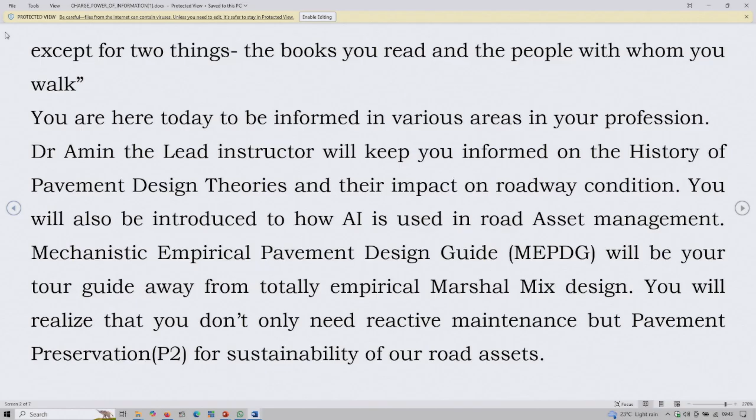You will also be introduced to how AI is used in road asset management. Mechanistic empirical pavement design guide will be your tour guide away from totally empirical Marshall mix design. You realize that you don't only need reactive maintenance, but pavement preservation for sustainability of our road assets. At the end of this program, you will have access to professional materials that can enhance your skills and help in your pursuit of excellence.

And I am also convinced at the end of this professional impartation that you will either be running with a vision, going on a mission, or burning with a passion. Belong to any of these. Happy participation.

A round of applause for Dr. Ayo TB. Thank you. That was wonderful. Information is key. Ladies and gentlemen, so now just a quick one.

Yesterday we had introduction to roadway network components, parameters impacting road network conditions, resilience, and sustainability, history of pavement design theories and their impact on roadway conditions. We had discussions, questions, and answers, and yesterday was the opening ceremony. Today is going to be a very beautiful and wonderful day.

May I now invite to the stage for his citation our lead speaker for today, Engineer Dr. Patrick Amoah Becker. You can come up stage now. His citation is on page 10. I'll quickly go through it so you know who will be taking us. Just stand and face. I'll read. Now, the citation of Dr. Patrick Amoah Becker.

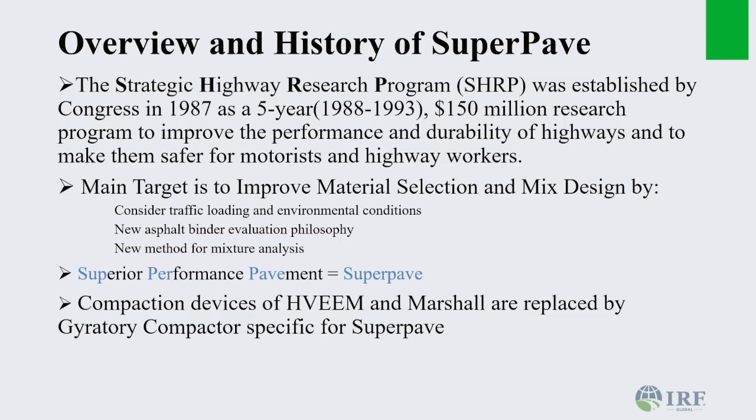I should point this way. Okay.

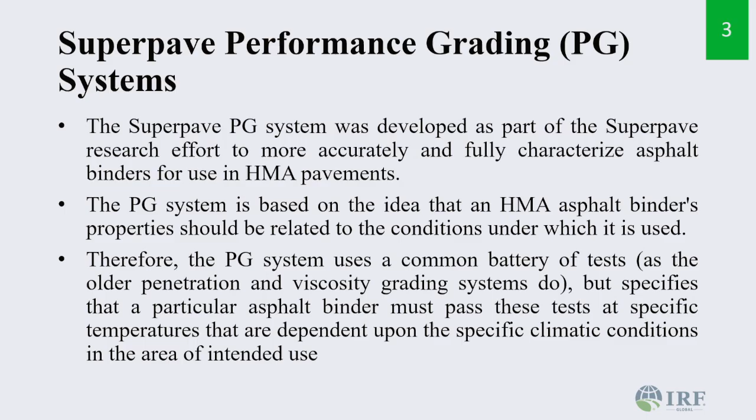So they developed what we call the PG system, performance grade system for hot mix asphalt. And before I go ahead, I don't know whether yesterday you talked about it. When I returned from the US, I was in a meeting in my office talking about asphalt, and the old people were all watching me. You are working in feeder roads and you are talking so much about asphalt, what's wrong with you? So, you know, we use bitumen. The Americans call it asphalt.

Sometimes it's confusing for us when we say asphalt. They think we're talking about the concrete, the mixture. Okay, it's the same in Nigeria. So I was actually talking about bitumen, the binder, but everybody in the room was thinking I was talking about the concrete, the mixture. That's the American way of calling the bitumen. So when I say asphalt, know that I'm talking about bitumen, okay? Or I'll use binder instead.

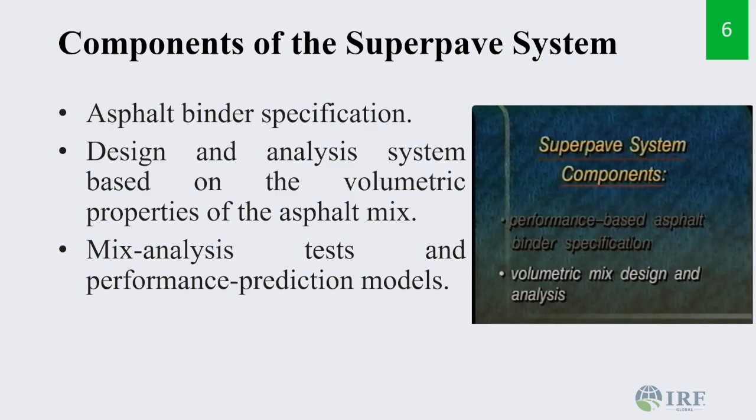So let's try and understand the Superpave mixture. It had certain components, and mainly we wanted to understand the binder and the volumetric properties. So what about the binder did we want to know? Remember, what do we do in Marshall? In Marshall, what are the tests that you typically do on your bitumen?

Stability, flow, penetration, yes. Now, just think about the test, the meaning, and what do we want to simulate? You realize that this test gives you, yes, an idea of the temperature that it can resist in a way, but what they sought to do under Superpave was they wanted a binder that can withstand high temperature, which will affect rutting. Yesterday he talked about it, and also very cold temperature.

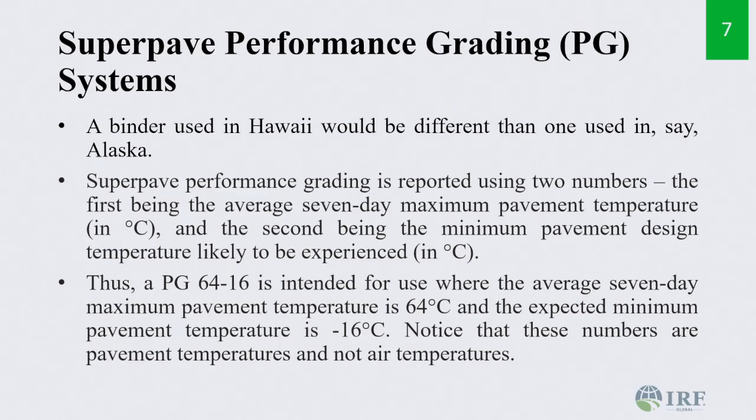So just by looking at the binder grade, we'll be able to tell the various temperatures, whether it's in cold or warm temperature. So they developed what we call the performance grade system, and I'll explain that going forward. Okay, so what is the PG system? So the PG is the performance grade, and here we are simulating the environment. We are simulating what? The environment.

Now, so how do we come up with it? So the highest temperature, and they did this through research, is pavement temperature, not air temperature. So you cannot just use your air temperature to determine it. You can have the air temperature, but what is really affecting it? So they used 20 millimeters, and actually went around and looked at various asphalts. When the air temperature is maybe 32 degrees, what is the pavement temperature? And they looked at 20 millimeters below the surface of the asphalt.

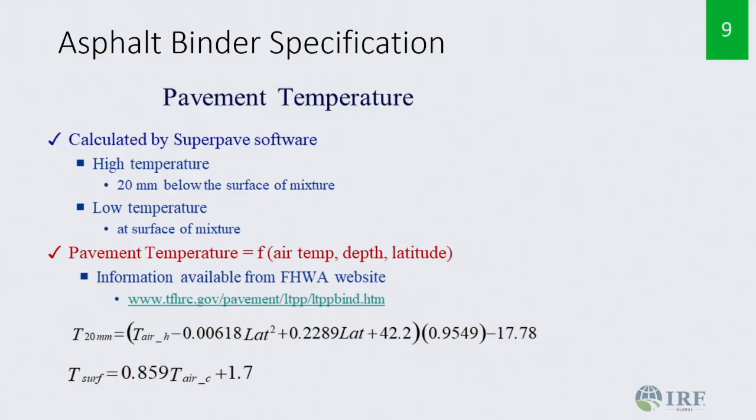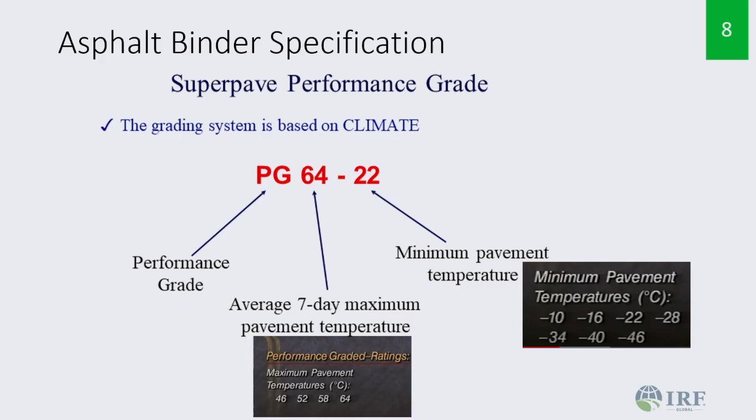What they did was that, you see the combinations there, the various temperatures, 46, 52, 58, 64, and you can see the increments, 6 degrees. So depending on where you fall, because there can be so many different temperatures, they had this temperature gradation at 6-degree intervals. So for example, if your pavement temperature is around maybe 48, then you will typically choose grade 52 for the high temperature. And there are various combinations of the minimum temperatures, and the increments are 6 degrees Celsius. I hope you get a picture here. Very good.

Now let's look at the binder. So we are now dealing with the asphalt, the binder. One of the things that they looked at is the rheology, basically the flow properties of the binder, then the in-service properties, and how the environment affects it. And when we talk about the environment, we are looking at the short term and the long term. So you agree with me that when we deal with asphalt, or bitumen, what happens when it comes into contact with the environment? It's the same for Marshall. Please, your thoughts.

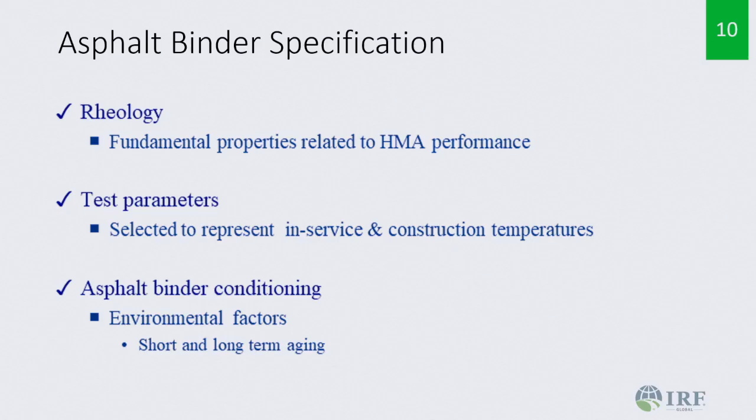Oxidation. So the presence of air, or even moisture. To an extent, air and moisture will oxidize it. And so we want to simulate the properties within the short-term and also the long-term oxidation. And that's what they did going forward. So now let's look at the tests that they did.

So in terms of the rheology, they looked at the rotational viscometer. Remember, someone talked about viscosity tests. You do that in your Marshall, am I right? That's what you said. Then they looked at the dynamic shear rheometer. I'll explain that a little bit. Then they looked at the bending beam rheometer. So these are tests on the asphalt, the bitumen. Then they did the direct tension test.

Then they looked at the aging property when it comes into contact with air. When it comes into contact with air, it oxidizes, as you rightly said, or it ages. And so they looked at the short-term aging, and then the long-term aging. I know some of you are taking pictures, but you don't need to. I'll make the slides available again to you.

Now, basically, this is what we are dealing with. You are dealing with a spectrum of tests that you will conduct on the binder.

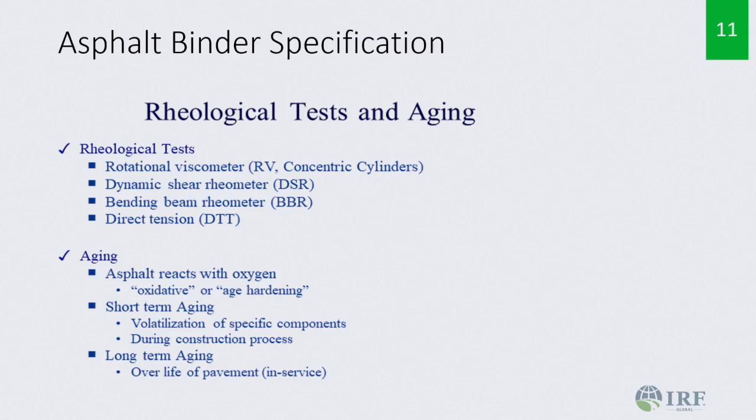But in all the tests, one of the things we do is we look at the non-aged, that's when we've not introduced air and moisture, and then we look at the aged. The aged is the rolling thin film oven test; we use that to age your binder, and then we look at the short-term aging. For the long-term aging, they introduce what we call the pressurized hot asphalt, the PAV, the pressurized asphalt aging equipment. Now, it's for long-term oven conditioning, so they pressurize it.

That's the equipment over there, and that's what they use to simulate the test. So they send the asphalt to these various conditions, and then they test them and look at the properties of the asphalt. So let's now look back.

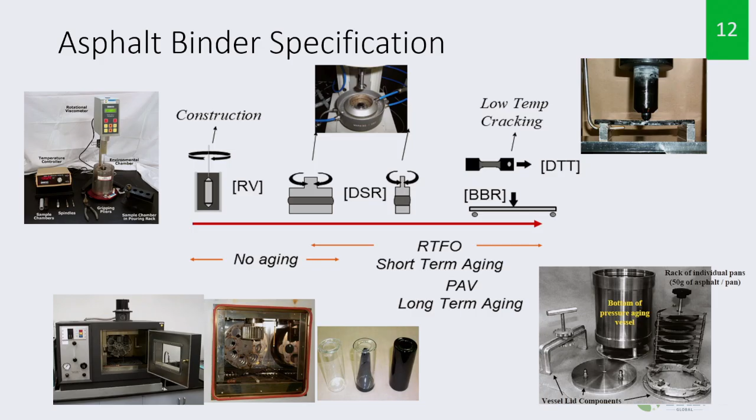You conduct some tests, but in all the tests under Superpave, you look at non-aging and aging. Then within aging, you are dealing with short-term aging and long-term aging. Please, is that well understood? That principle, I try to put a lot of things on the page to simulate it.

So for the asphalt, based on the test, in the next slide these are the possible combinations. Remember, we saw this based on the various temperatures. So if I'm in Ghana and I say PG 6428, what does PG 6428 mean? What does it mean? Let's understand the nomenclature.

Okay, I don't want to hear from that side, I want this side. Just one minute, I think you are an asphalt person. Just to get whether we understand the concept. Anyone from here to help me?

6428. So minus 28 is the lowest, and 64 is the higher temperature, the 7-day maximum. And remember, in the 7-day, we are looking at the asphalt temperature. Remember, all these are in degrees Celsius. So at least, if we live here and we ask you about any PG grade, you understand what it means. Please, is that clear?

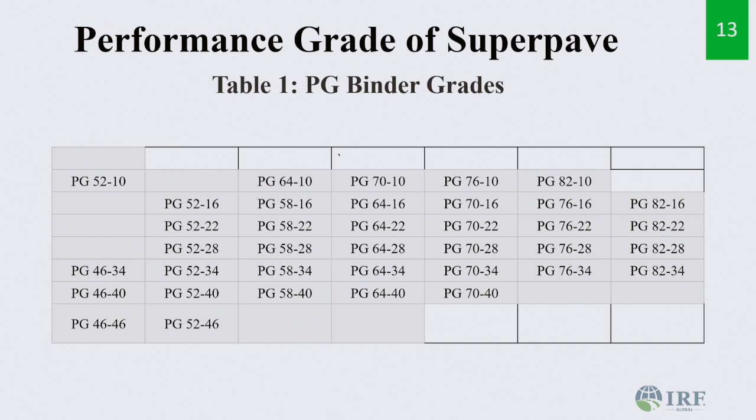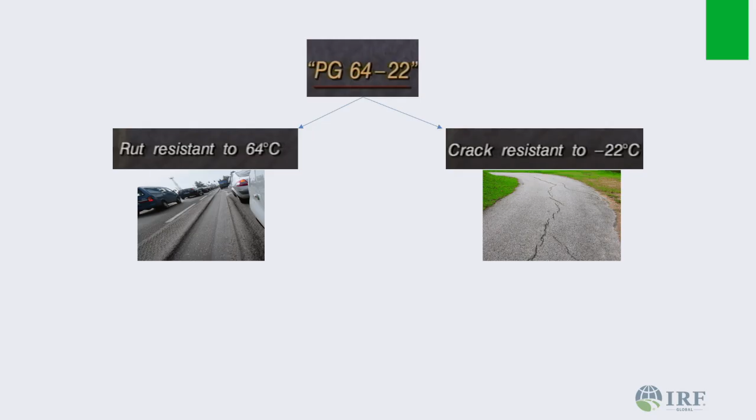Okay, so can we go ahead? So this is just to emphasize what we are dealing with. In all the tests, this is looking at the rut resistance, the high temperature, and also the cracking resistance, we'll come to that.

So for every grade, there are limits, and as I said, this is based on a lot of testing and research that they came out with these recommendations. Thank you very much.

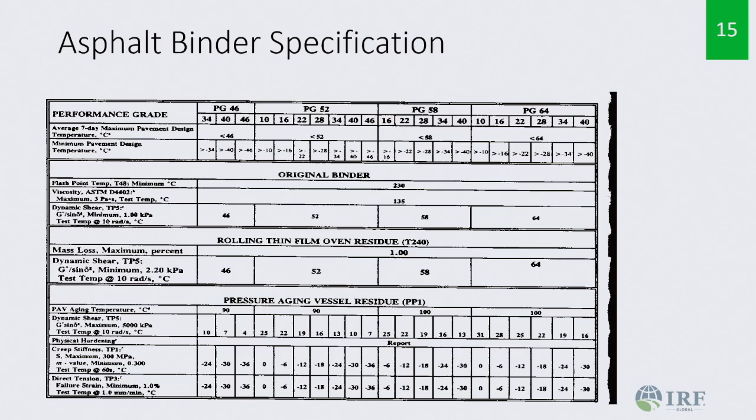All right, so remember, this research was not done in Africa. It was done in the US, and so they were able to establish for various climatic zones and areas the typical regions that you use. So if you know the US, whether you are on the West Coast or the East Coast, the South or Middle, these are the typical ranges.

So I was in Florida, and we were typically 67, 76. Our temperatures will typically go high, and so we will have very high temperatures, and rutting was a major problem for a lot of our asphalt.

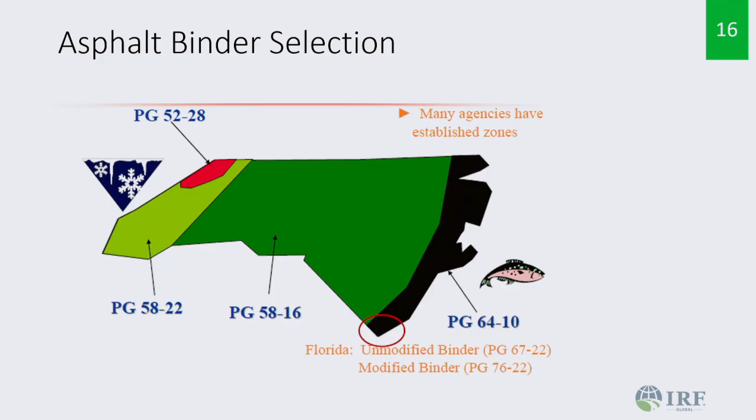I have a feeling, and for the few that we've done, if I'm right, we normally adapt that of Florida in Ghana. And I believe Nigeria too, because you also have very high temperatures. Your low temperatures aren't very low, but you still have very high temperatures. So if you are to adapt, these are things you need to think through in adapting a particular PG grade.

So I talked about data. I'm just re-emphasizing that they were intentional. They built, and tomorrow when we look at MEPDG, it's once again about data. They've built a lot of stations, they've been collecting this data, and they still do it. Under the long-term pavement performance program, they're still collecting data and dealing with it.

Now they are dealing with long-term pavement performance, LTPP. I'm sure most of you are used to the long-term pavement performance program, and they want to build pavements that will last 75 years minimum, 100 years and above, with minimal maintenance.

So we've looked at the binder. Now we want to look at the aggregates, before we go to the mixture. That's what we are doing. So now, the aggregate properties.

Under Hveem, Marshall, what test do you do on them? Let's name them, we are learning together. Abrasion, LA abrasion, ACV, flakiness. I thought what Prof said yesterday would be the first. Do you remember yesterday he showed us something? It's common whether you are in concrete or in soils, that was the commonness. So I thought that would be number one. Anyway, yes, so the test is basically the same.

Now, but there were issues about the limits, so they came out with what we called the consensus aggregate properties. These are the consensus aggregate properties: fine aggregate angularity, clay content, coarse aggregate angularity, and flat and elongated particles. One is for the coarse, this for the fine.

Then, depending on where you are, they said this is the source aggregate property, it's not constant. So they looked at toughness, soundness, and deleterious material. And like you said, gradation was common for everyone. So these are the three main aggregate properties that we looked at under Superpave: consensus aggregate properties, source aggregate properties, and gradation.

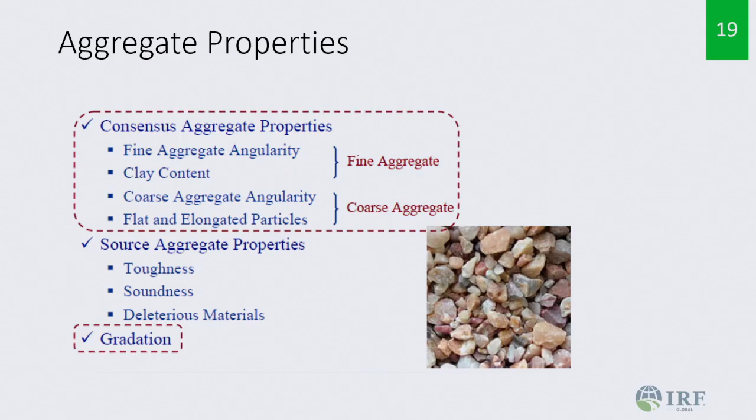You can say two, because gradation is so... Well, the properties and tests I'm not going to go through, but I believe most of you know when it comes to abrasion, we know how to determine it.

And you'll do that. For coarse aggregates, they have some steel balls, am I right? What is the standard? Most often 12, am I right? You put a certain sieve size of aggregate, you roll it over some revolutions, and then you weigh the aggregate before and after to see what has been lost, and you're actually looking at the percentage that has been lost.

And what does it simulate? Abrasion. In real life, what are we trying to deal with?

So if we have two aggregates, one has an LA loss of maybe 6%, and another one has 12%. What is the difference? Sometimes we get bogged into the tests, but we need to understand. My professor always says, what is the meaning and what is the implication? It's very, very important. So what's the difference, 6 and 12%?

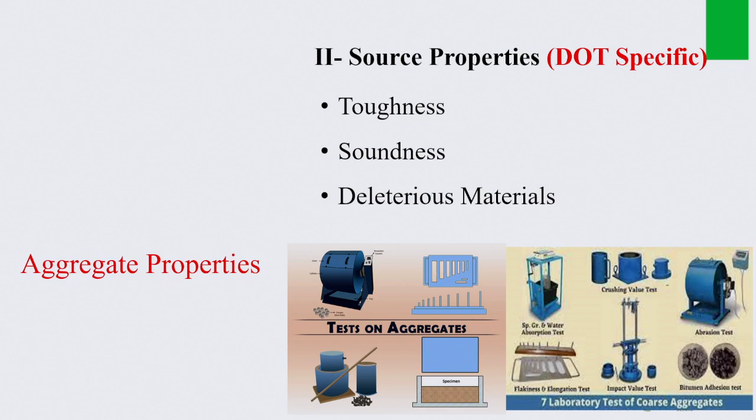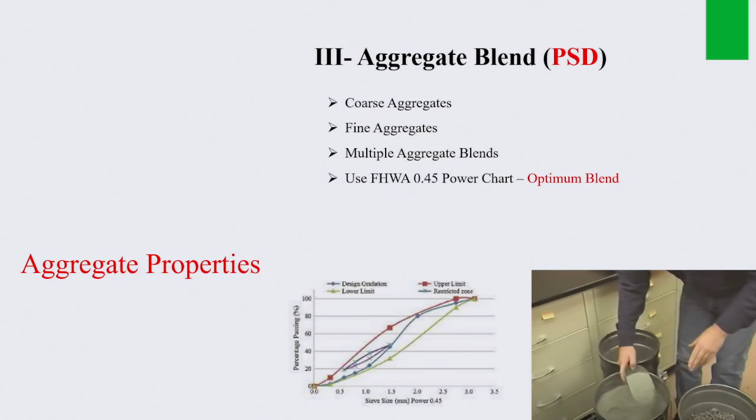So the next thing I want to talk about is the sieve analysis. The sieve analysis is our normal sieve analysis, but in asphalt, they use the 0.45 power gradation curve. Who knows about the 0.45 power gradation? We use it commonly, and it's found to give you the maximum packing density if you're on that straight line. From packing theory, it means that more aggregates can fill the voids, and it can be the densest. You see the line there, the straight line at the top right. That is the 0.45 power gradation.

Now, what they did under Superpave, they defined certain things. I'm going to go through the aggregates. One, they gave some designations, aggregate designation, mainly based on the nominal maximum size and the maximum size of aggregates.

Please, what is the nominal maximum size of an aggregate? We see that a lot in documentations when we are doing work, we use the nominal maximum size. Are we following? So what is the nominal maximum size? Or I'm not supposed to ask questions? Of an aggregate, whatever. When we say nominal maximum size, what comes into your mind?

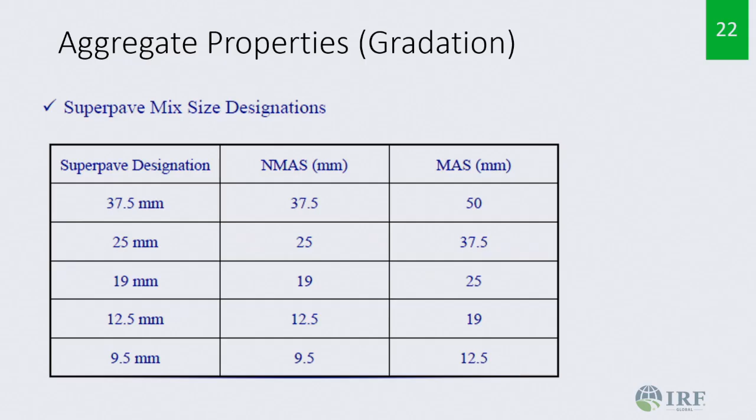So for example, I'm using the 37.5 Superpave gradation curve. So this is the example that I'm using, but you can have the 19 millimeter, or you can have the 9.5 millimeter Superpave gradation curve, and the control points and the restricted zones are different. So in this particular case, you see those points here are the control points. That means your gradation curve should fall within those control points. Then the small envelope, you see at the top right, that small curve is a restricted zone.

Prof, my current reading is that now people are disputing the restricted zone, that it's not necessary, you can pass there and can still perform very well. But generally, this is the guideline, that we should still use the restricted zone. Rutting, yes. True. Precisely. So I'll talk. Thank you very much.

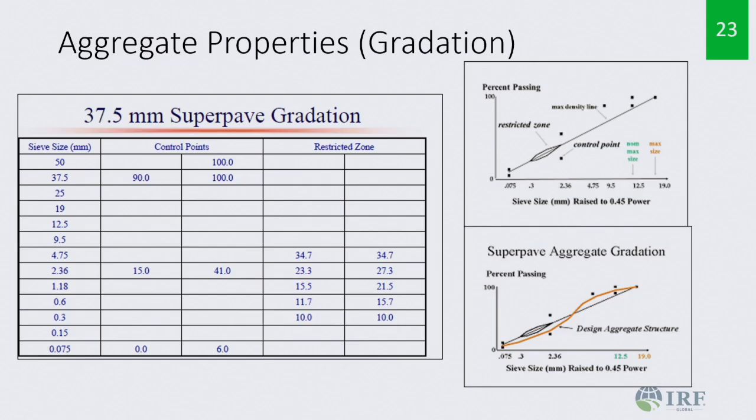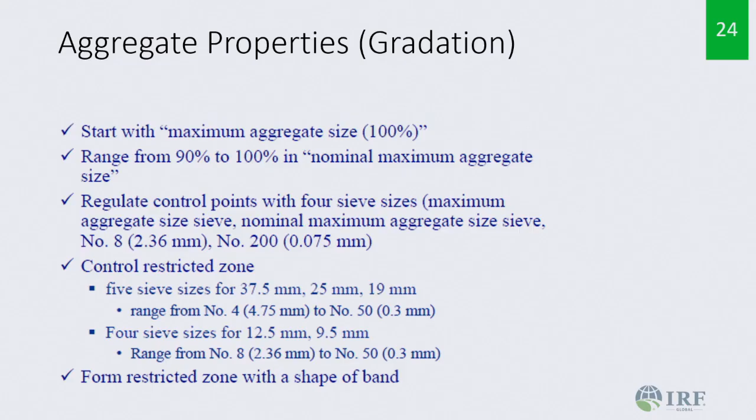So the point I'm trying to make is that whatever gradation that you give, you should ensure that you avoid the restricted zone, and you stay within your control points. Okay. Now, this is just a guideline, and I'm not going to go through it, for those of you who are in the lab, how do you do a Superpave aggregate gradation? And this procedure has been given. You can look at it. It can help you in future.

Well, so what we've been able to do, let's step back. Now we understand the binder. We now have an idea of the aggregates. And we just ended with the aggregate gradation. We said that for the aggregate, there are 3 key properties. What were they? The first one is what? The consensus. Do you remember? The second one, the source. And the third one, the gradation. And in each one, there are certain tests that we are supposed to do. I ended with the gradation, and under the gradation, we have certain control points, and then we deal also with the restricted zone.

When we come to the volumetric mix, I will show curves. Typically, you don't do only one mix. Typically, you do 3, but 3 is the minimum. If you can do more, it's better for a particular asphalt mix. So now let's go to volumetrics. The details were not part of the slides, but yesterday, when there was a question on asphalt and the voids filled with binder, in the night I started thinking through, and I modified the slides to deal with it. But perhaps this is what we are dealing with.

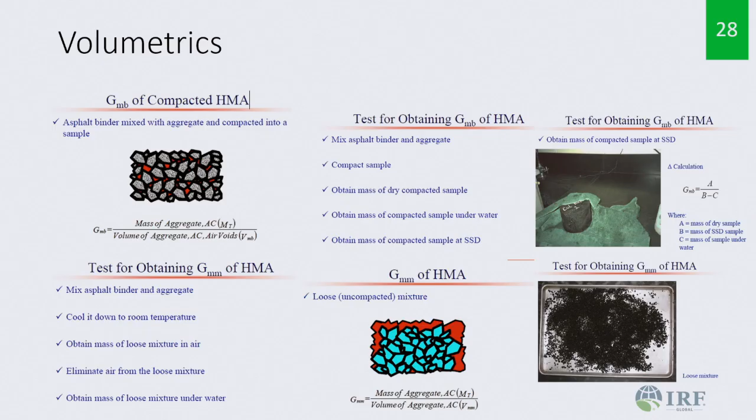So, because of time, I'm not going to go through this, but for each and every one, who knows about the Rice test? Rice test. You should know it. You do it to determine the maximum density of your asphalt. You do it also, yes, in Marshall. So whatever it is, it was made by Rice, so we call it the Rice test. Basically, the properties and the various determinations are down there. So that's the volumetrics, and I've explained how to determine all those various properties.

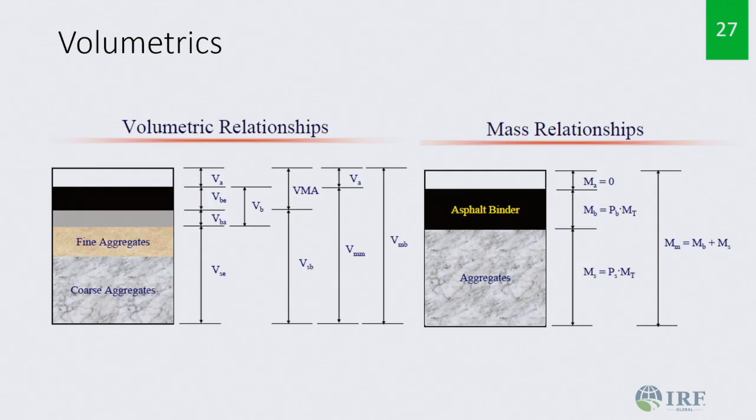I will want to end here for now. But a quick one, before we come to the Superpave design, what I've shown here, you see the subscripts. Down here, you see, if you say Gmm, okay? So, yes, precisely. You say the last subscript first, before you come to the first one. So let's give an example here. So here is Gmm, maximum mixture gravity. So you can use the subscripts there, and it's so easy.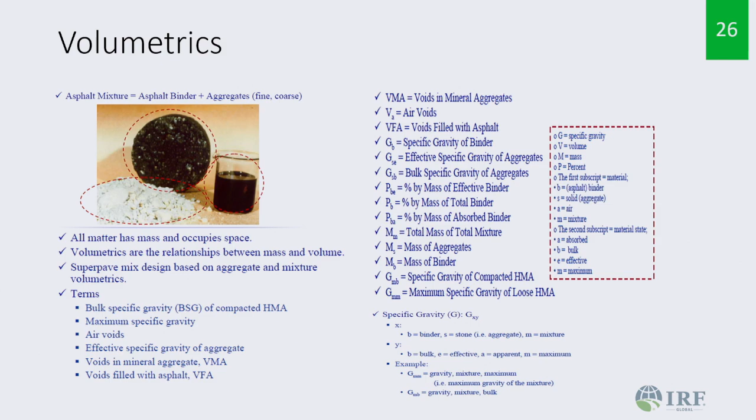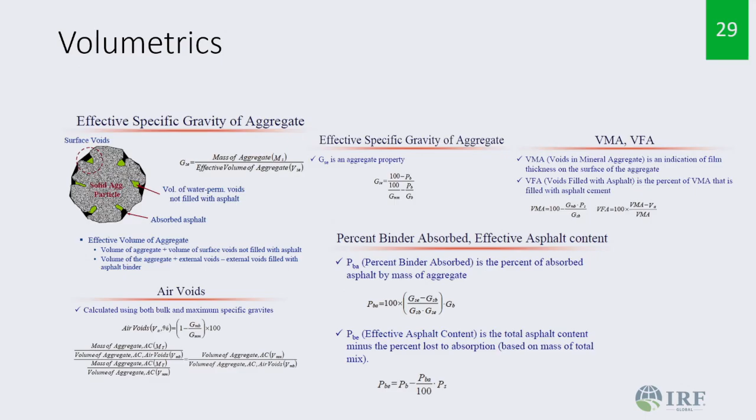That's why I've given you this sheet. And when you go forward here, you can then explain all those calculations, the volume of voids, the maximum densities or effective asphalt content. If you are doing the mix design, you can do that. Now, what we're going to do next is how do we actually do the design? So far, we are saying that we need to know the binder properties, the aggregate properties, and we just started the mixture, but I just gave you the volumetrics of the mixture. We will now go to the design procedure, and then we'll end it there.

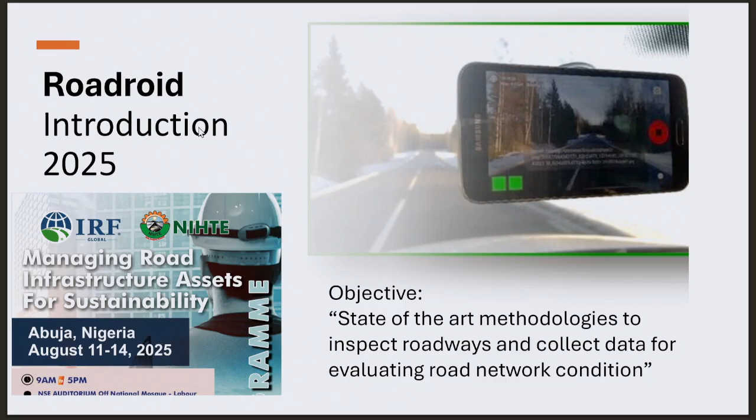This is just a short introduction about me. I'm a global project manager for Roadroid, and as such, I handle a lot of our different global projects. Next slide, please. Yeah, you can take the next one again.

So I will get straight into what we do at Roadroid, what our solution is. It's road surveying, and it's based on Android smartphones. Connected to that, we have a cloud service where you manage all the data that you collect with your smartphone. We are an IQL3 device, response type. I guess most of you are familiar with road surveying, and you would know that there are different IQL levels. We will come into that in more detail. We are, anyway, IQL3.

With IQL3, the app records IRI values, and we have a GPS coordinate matching that IRI value for every second. We take photos or videos; you have a choice to do one of the two. The data is collected on the phone. You don't need an internet connection to collect data, but when you have an internet connection, you upload it.

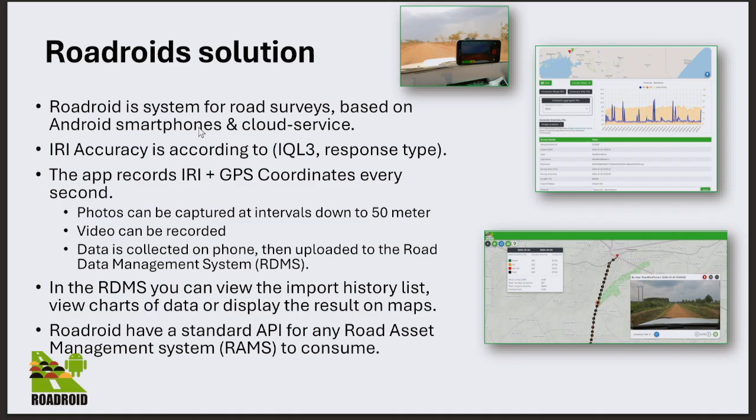And in our road data management system, you can view the data and analyze it in different ways. And you can also export it via an API. Next slide, please.

This is just another way of showing what I just said. So it's a very easy setup with the smartphone. You have the possibility to do a calibration procedure. You do your survey, you upload your data to the cloud service, you view it, you do different kinds of analyzing and inventory. We have an AI tool, which I'm going to talk a little bit more about. And you can also extract all the data from our system.

Next slide. So Roadroid compared to other systems, I hope while I'm continuing my presentation that you will see these main benefits that we promote compared to other road surveying systems that are out there. We are low cost, license based. You pay a monthly license fee, and it depends a little bit on how many units you have and for how long time you subscribe to a license. But the low cost structure gives you a possibility to have many units.

It's easy to use. These days, everyone knows how to use a smartphone, to download an app, to use an app. The interface is easy to understand for everyone. And this also means that you can use it often. It's portable. It's a smartphone. You can bring it anywhere. You can use virtually any car. Some limitations, I will get into that, but in essence, you can move the data collection equipment around much easier than if you would have a specially equipped car with different kinds of sensors on it. So all this allows you to do more frequent surveys and to also, as mentioned, integrate with your RAMS.

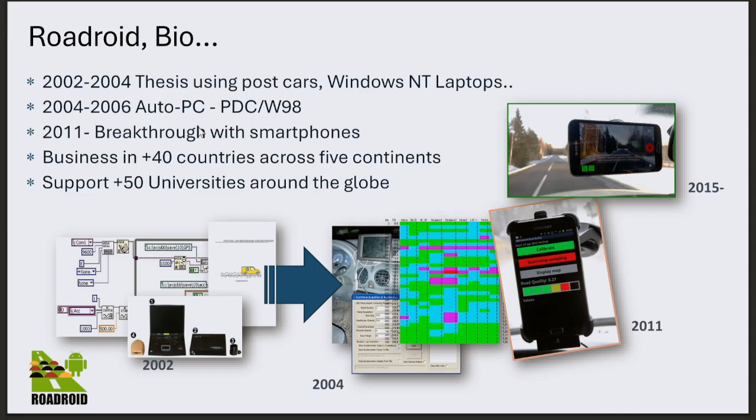Short on Roadroid's history, which is this slide. We've been around for a while using different technologies, but as you probably understand, our breakthrough came with the use of smartphones in 2011. And currently we have business in about 40 countries across 5 continents. And we also continuously do research and development with universities all around the globe. One in Nigeria for the moment, I think, for example. Next slide.

Some reference projects. As a Swedish company, of course, we have worked closely together with the Swedish Transport Administration Agency for many years. We have done quite a lot of work in the United States, mostly on county level, and the road networks they are responsible for. We work with larger organizations like the UN, UNOPS, the Asian Development Bank, the World Bank, of course, and those projects can take place in many different countries in the world, mostly developing countries. Then, next slide.

Indonesia is another example. New Zealand. On the African continent, we have worked in several different countries. For the moment, we have a large contract in Uganda. It's no longer with UNRA, I don't know how much you keep track of other countries on the African continent, but UNRA is now integrated into the Ministry of Public Works, I think, or possibly the Ministry of Transport. And we also work with the Roads Authority of Namibia.

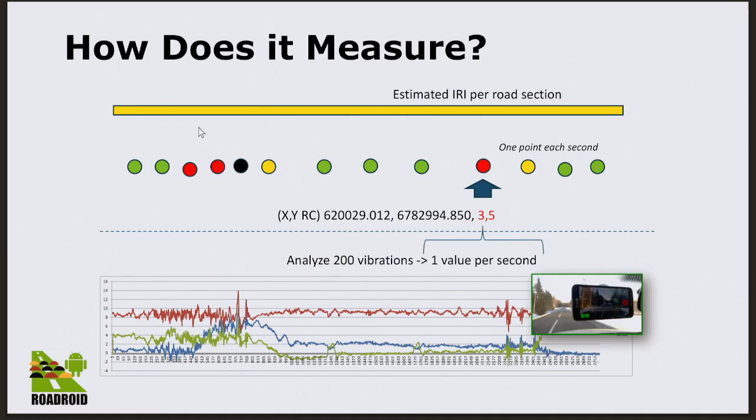A little bit more about the technology, the IRI. We use the accelerometer of the phone, and the accelerometer is capable now in most phones of analyzing 200 vibrations, which gives you one value per second. So that is the raw data. Next slide. And that raw data, through our software, through our algorithms, is then translated into a value that correlates with the International Roughness Index, which I also think is something most of you are familiar with.

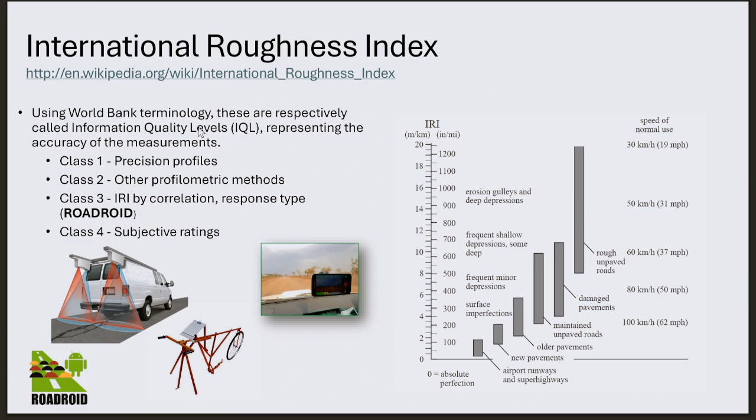Class 1 would be precision profiles, laser profilers. And that's the most accurate way of measuring IRI, of course. And again, as mentioned before, we come in the category of class 3 together with ROMDAS and other bump integrators, and other solutions that are response type 3, in many cases using an accelerometer of some kind. Class 4 would then, of course, be the subjective ratings. Next slide.

I will just touch on this briefly. If you have any specific question around this, we can take it in the Q&A session later. But we have 2 different ways of measuring the IRI. The EIRI, the estimated IRI, is what most of our customers use. And that's mainly because it has a built-in speed compensation. It can be difficult sometimes to keep a consistent speed. It's preferable to do that even with our system, but if not, we have a speed compensation built in. And it's also sensitive to typical damages that you want to track during your surveying, like potholes and rough texture.

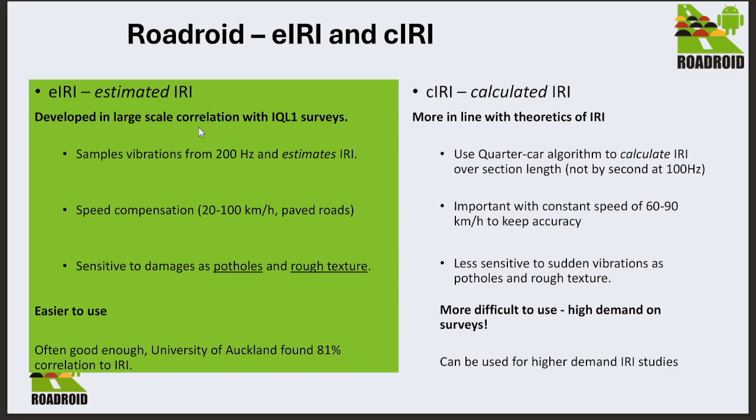The CIRI, the calculated IRI, which is also used, is more in line with the theory of measuring IRI and uses the quarter car algorithm. So 2 different ways, a little bit depending on what the customer wants to use. Next.

To get better accuracy, as we are an IQL3 device, there are some limitations to that, and the accuracy can be improved by calibrating the data collection unit, the smartphone, before you run it on a specific section, and that is done by running the system on a known section where you have an IQL1 measuring device that has measured the value. So just to let you know, there is a way to calibrate and fine-tune our system.

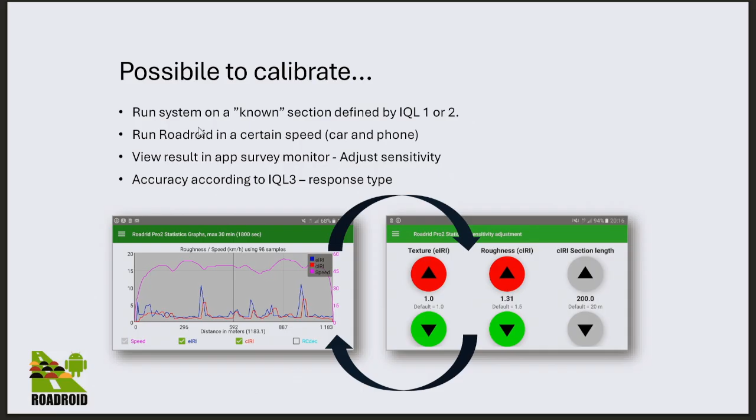Some important preconditions, which is based on what our system consists of. You, of course, need a vehicle. Even bikes are used sometimes, actually, but of course, normally a car. And we have some different standard vehicles to choose from. But the most important thing is to have a car that has a good suspension, not a sports suspension, for example, and to make sure that it's properly balanced, using the right standard tire pressure and so on.

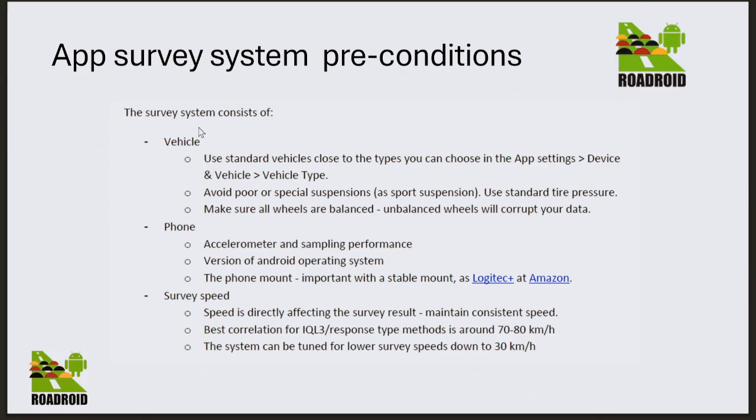And all of this is, of course, to avoid unnecessary vibrations coming from the car and not from the road. So that's why it is important to have a well-maintained vehicle. The phone: use preferably a higher-end phone. Even though most phones today have an accelerometer, you still need to have a proper phone. And also, if you can, even if we have compensation for it, try to keep a consistent survey speed. And also connected to the phone, it's important to have a steady phone mount, not just an ordinary phone mount. And again, that is to eliminate unnecessary vibrations.

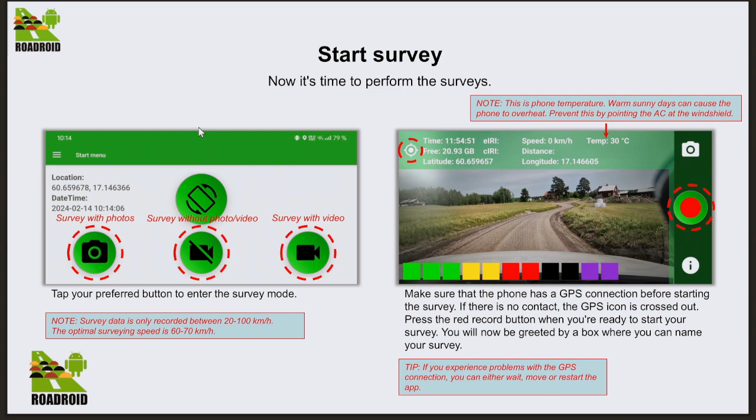Yeah, and this is from the app interface. So when you start your survey, you can pick different surveys. You can choose to just record IRI values. You can survey with photos or with videos. And this is basically what it would look like on the screen when you're out surveying. The phone is always placed on the windshield of the car, if I haven't mentioned that before. Next slide.

So once you have collected the data, and you can do that without an internet connection, without any SIM card, anything like that, go back to your office, make sure you have a stable internet connection, and then you upload the data that you have collected. And within 10-15 minutes, it will appear in our cloud road data management system. Next.

And once it's there, you can view it. You will have a list of all your files. If we have time, I will show you a little bit of this live online. No, sorry. Of course, I can't do that when I can't share the screen. Okay, so we just have to look at it in this way.

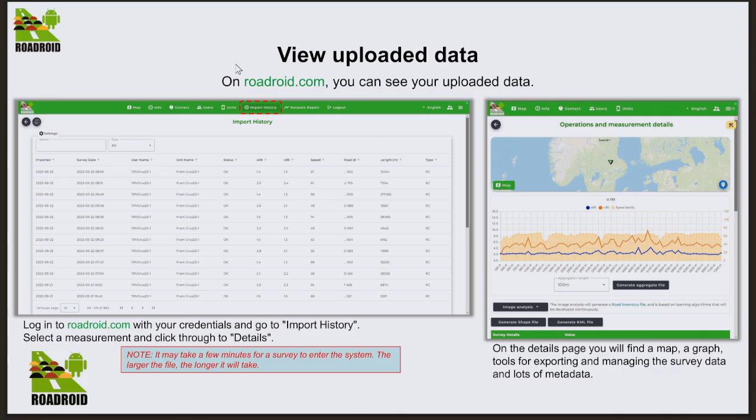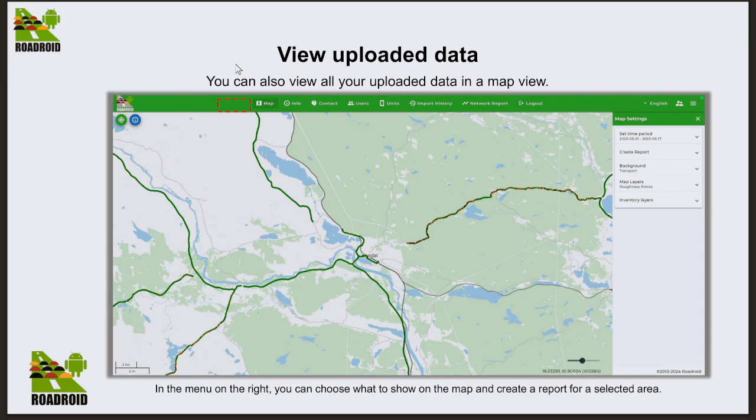Import History: when you click on a file in the import history, you can get more details on that file, and it would show you the different IRI values that are recorded and all the basic data from the survey. Next page, please. And if you go into the map view, it would look like this. And you would have several different options for how you want to sort the data in the map view, if you want to look at photos or not, if you want to zoom in to look in more detail at the IRI values. Next.

We do have a simple system to categorize the recorded IRI values, which would show on the map from green via yellow and red to black, where green is good and black is poor. So that is how you can get a first view of the IRI values, and the photos you take will also be GPS positioned and placed on the map, so to speak.

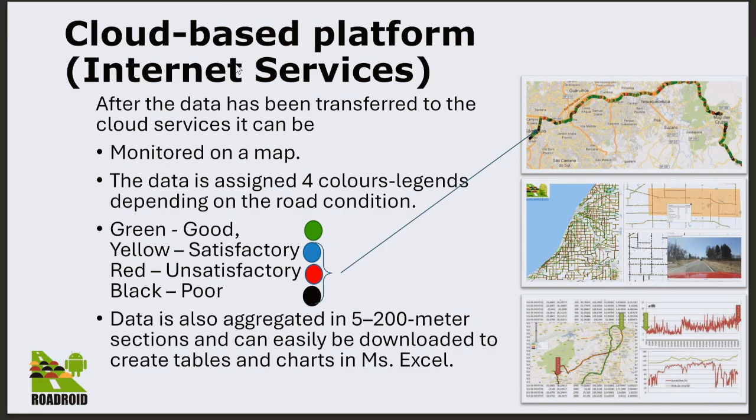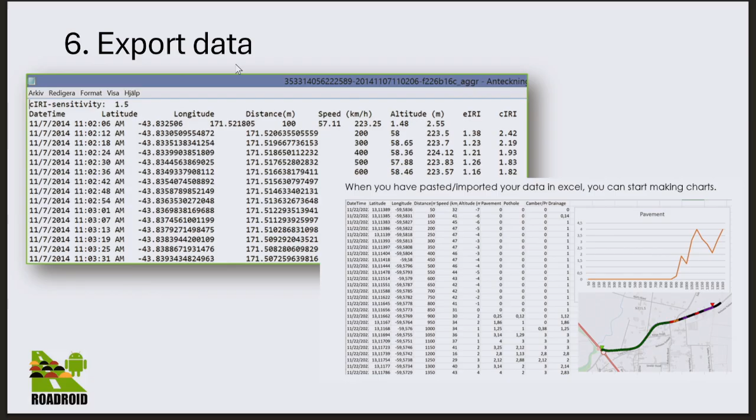And if we take the next page, this is what you would see if you export the data and want to look at it in more detail and work with the numbers, so to speak. There's also a possibility to do that. This is from Excel, for example. We also have different GIS formats that you can export the data into. Next.

We have a tool in the system where you can manually make an inventory, and it's quite convenient. Quite a lot of our customers use this. Once you're back in your office, you go through the photos or the videos that you have taken, and you can then map on each photo if you see a drainage condition, loose gravel, a pothole, or several. I think we have up to 25, 30 different categories that you can use for the manual inventory. Next.

And of course, as everyone, we are doing a lot of AI these days, and in our case, the AI is of course to work with image analyzing. This is not for video for the moment, but for recorded photos.

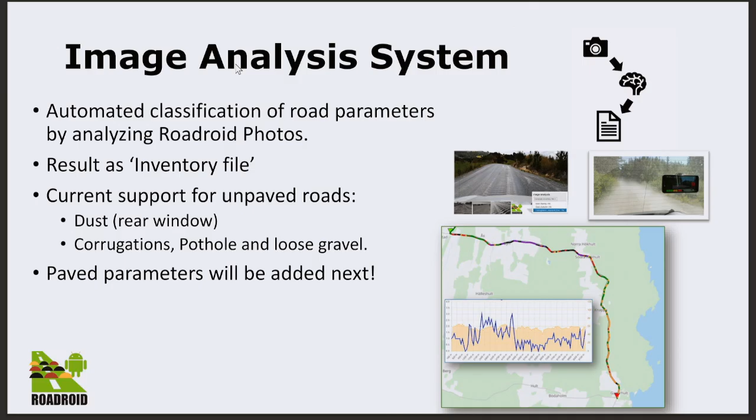What we can automatically detect with our image analyzing system is dust, if we place an extra camera in the rear window, and corrugations, potholes, and loose gravel. As you understand from that list, we are now in the beginning mostly focusing on using our AI for unpaved roads, but there is a possibility, and we have also done some of this image analyzing for paved roads. This is where, as we all know, the future is, to work more and more with automated image analyzing.

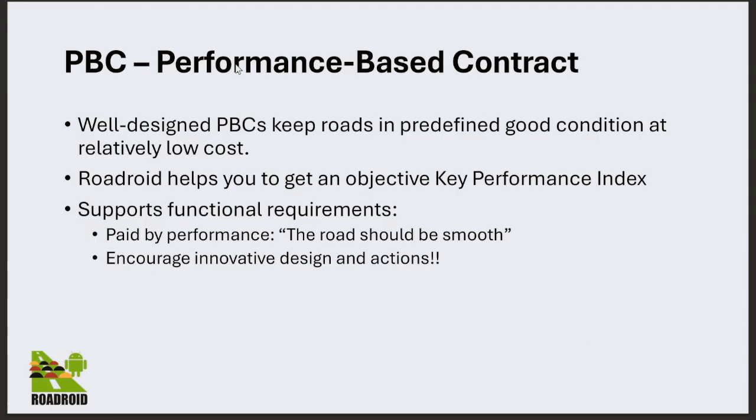So for maintenance of roads, one of the other benefits with Roadroid is that it can be used for evaluating performance-based contracts. I suppose that is something you touch upon during this seminar as well. I'll go to the next slide to show an example. This is where in Sweden our system has been used for creating performance-based reports. We then come back to the fact that the ease of use makes it easy to use Roadroid very frequently.

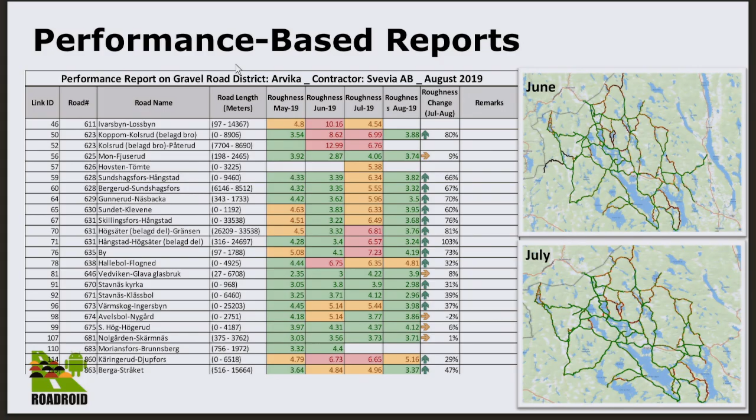If it's not visible, we have measured the same roads in 2019, every month from May, June, July to August. You can then track the difference between those four months and see how the road condition changes, or preferably not changes. In this slide, you can see that in some cases there is big change.

IRF is part of this seminar. We do a lot of work with IRF Global in different kinds of seminars. I can't show you this example now in detail, but this is also something we do when taking part in PBC seminars with IRF Global. Go to the next page, please.

We have done a seminar with IRF Global in Orlando, Florida since 2016. There was a break for COVID, of course. But this is also a comparison to show how you can track the performance of a road with Roadroid and compare it across different years.

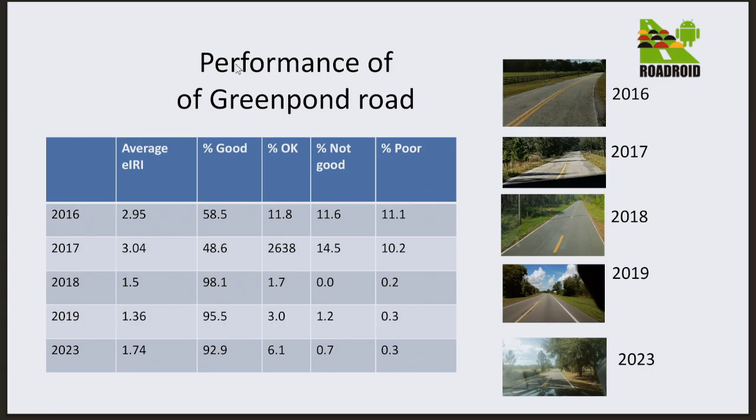In this case, you can see that if you look at the average EIRI, this road was in quite poor condition in 2016, 2017, and then it got a refurbishment in 2018, and it improved. Then the last time we did the survey, in 2023, it's still in good condition, but maybe a little bit deteriorating. So this is just another example of how to easily use Roadroid to track change over time.

Okay, so I'm about to finish my presentation. We will have a Q&A if you have any questions. My summary would just be to show you this picture again, to give you the basic one-pager understanding of everything that you would get in using Roadroid.

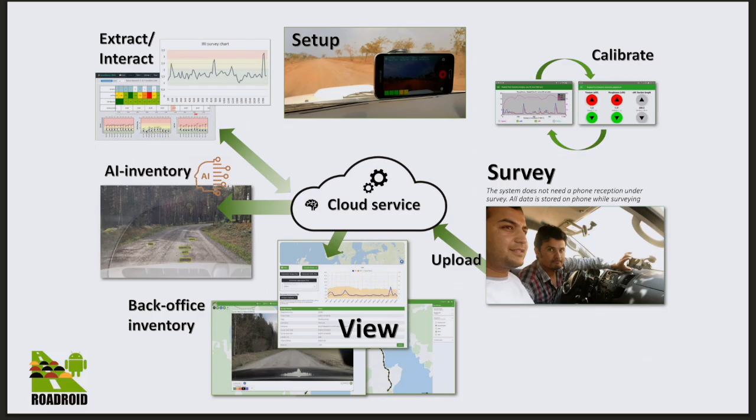I come back once again to what I started with, which is what we see as the main benefits of Roadroid compared to other systems on the market: low cost, easy to use, portable, more frequent surveys, and you can use it on low volume roads. Image and video analyzing is, as said, the greatest potential, I think. And we have an API that allows you to integrate your Roadroid collected data into your existing road asset management system.